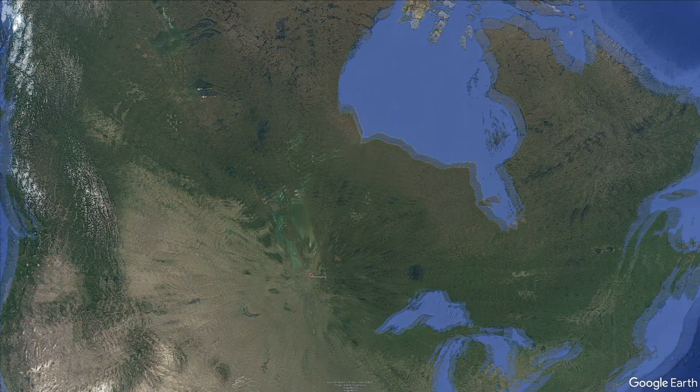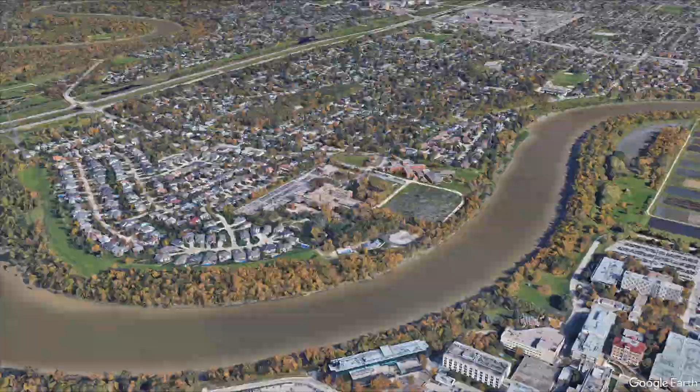Situated on the edge of the Canadian prairies sits the capital city of Manitoba, Winnipeg. At the very heart of the city, which 820,000 people call home, is the meeting point of the Assiniboine and mighty Red River. This site has served as an important gathering place for Indigenous peoples since time immemorial, and eventually also for European traders and settlers. It continues to serve as a meeting place today in the form of the vibrant cultural hub of the Forks.

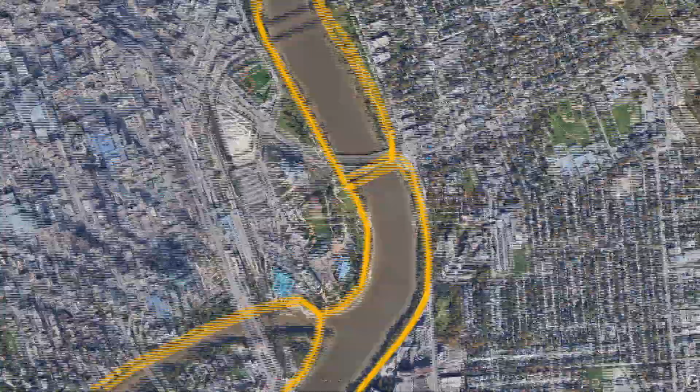The iconic Esplanade Riel currently provides an active transportation link between the Forks and the historically francophone neighborhood of St. Boniface, not only helping to reduce car dependency, but to also connect the scenic river trails on both sides. To improve this connection, the city is conducting a feasibility study into an additional active transportation bridge between St. Boniface and the Forks that can accommodate both park users as well as maintenance vehicles.

We are the University of Manitoba Steel Bridge Team. We are made up of over 55 diverse members and situated on the U of M's Fort Garry campus. Before we begin, we would like to acknowledge that the work done by UMSB was on Treaty 1 territory, which is the original lands of the Anishinaabe, Cree, Oji-Cree, Dakota, and Dene peoples, and on the national homeland of the Red River Métis.

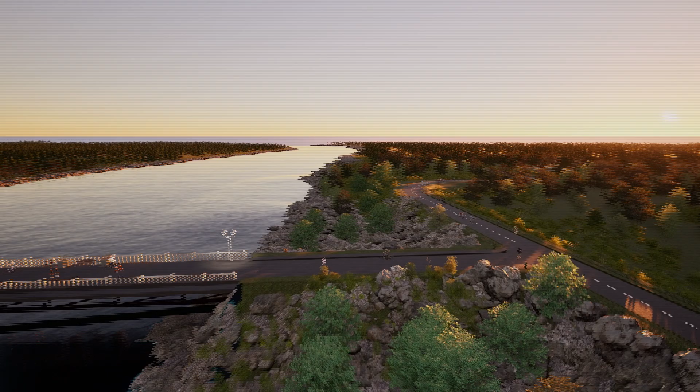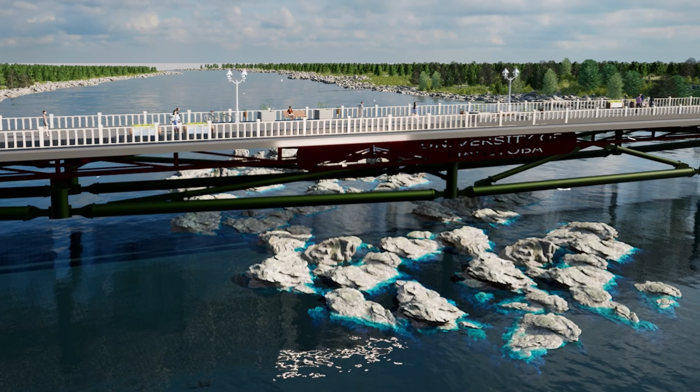The proposal calls for a 19-foot-long bridge designed to resist 50-pound lateral loads and 2,500-pound vertical loads. The city has requested that steel be used for the design for its versatility and its ability to be easily remanufactured after deconstruction, helping to create a circular economy for the project. The optimal placement for the bridge, however, is also located where an island sandbar has formed in the river. Being home to a variety of wildlife and birds, disruption to the island must be kept to a minimum during construction. Additionally, physical restrictions on site require that the bridge be asymmetrical.

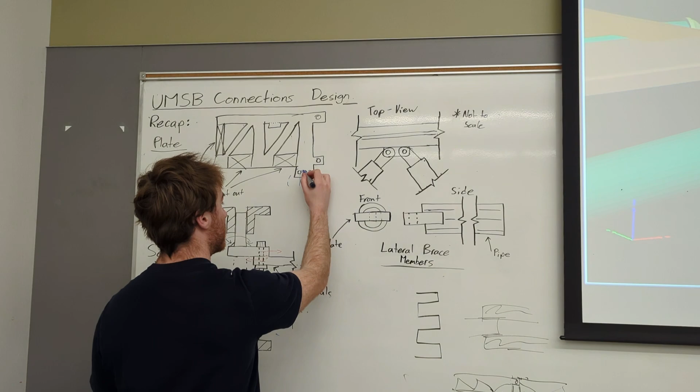Based on the design requirements and restraints, our team began working to create a 1:10 scale model of the proposed bridge. To begin, we started by splitting our design team into 4 different groups. This not only improved our team's efficiency, but also ensured that everyone was able to express their ideas in the preliminary design phase. This year, we decided to use the structural analysis software SAP 2000, as well as hand calculations to design and analyze each bridge, alongside the Handbook of Steel Construction.

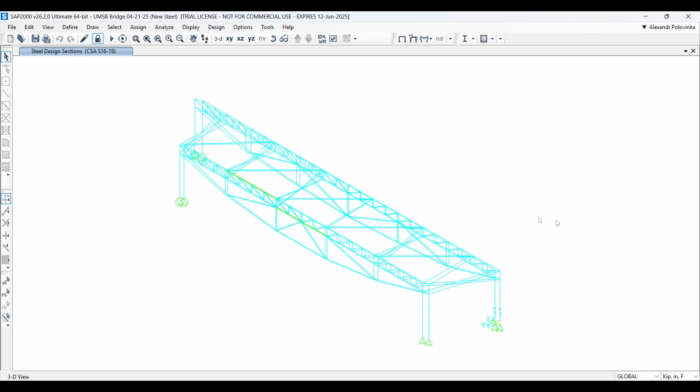Once each team had their frame designed, load cases and combinations were assigned to assess each bridge, allowing us to improve our designs. By using a scoring matrix obtained from the rulebook, we were able to compare the designs, the results of which were used to help choose our final design. The process was then repeated for the bridge connection designs.

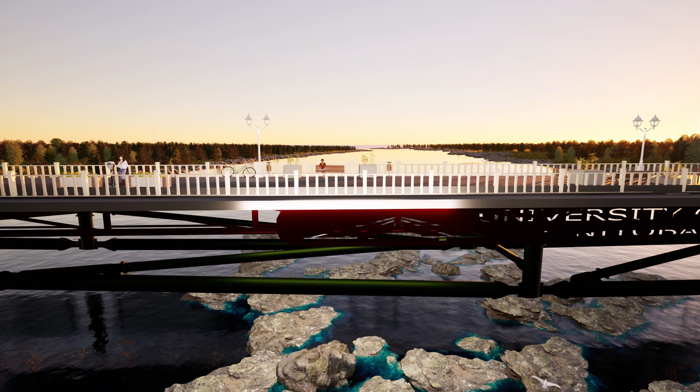Our non-symmetrical dual-chord system design features an open-web steel joist top chord comprised of pre-welded ELA members with a CNC'd plate web, as well as a more robust bottom chord comprised of individual pipe members. This satisfies the deflection requirements for the bridge while also minimizing the weight, improving the sustainability of the design. The two-system chord design was also chosen for its effectiveness against resisting load while minimizing deflection.

The bridge also features 3 types of connections. Single shear gusset connections were used on the bottom chord, which were chosen to improve constructability, while double shear connections were used on the top and bottom chords to meet strength requirements for the design. Finally, the lateral connections of the bridge are all single shear connections, further minimizing weight and improving sustainability.

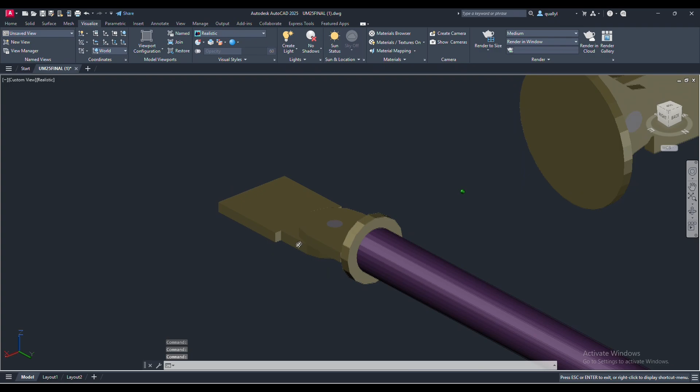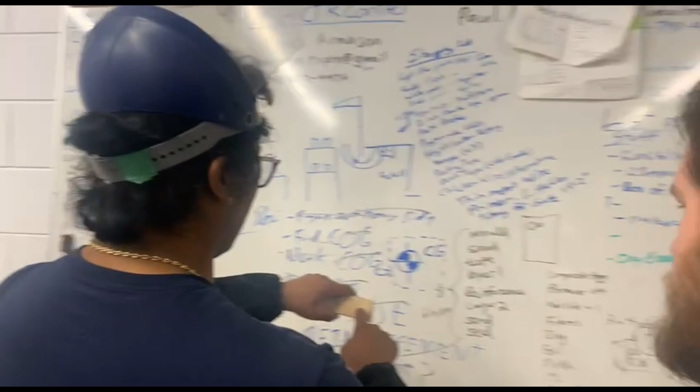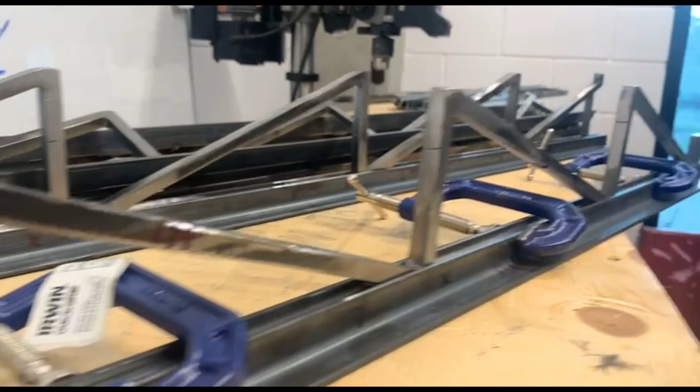Like past years, we partnered with a local company, Abesco Limited, to fabricate our bridge. However, this year our team decided to be more ambitious and to build up our in-house fabrication capabilities. As such, our fabrication team built out our stringers while also making modifications to further optimize the design. To aid in this process, our drafting team created fabrication blueprints as well as detailed 3D models in AutoCAD. This helped to create quality controls during fabrication. By working closely with Abesco's industry experts and combining it with the dynamic talent of our fabrication team, we are able to minimize mistakes, maintain quality controls, and find innovative solutions throughout the entire fabrication process.

From the beginning of the design phase, constructability has been a top consideration. This was achieved by getting input from the construction team at every phase of the project. This year, we're using 2 barges for both the construction and deconstruction of the bridge. This allows our team to work on both sides of the island, avoiding unnecessary disruption to the natural environment. These barges are then aided by a builder on both sides of the river, making for a total of 4 builders.

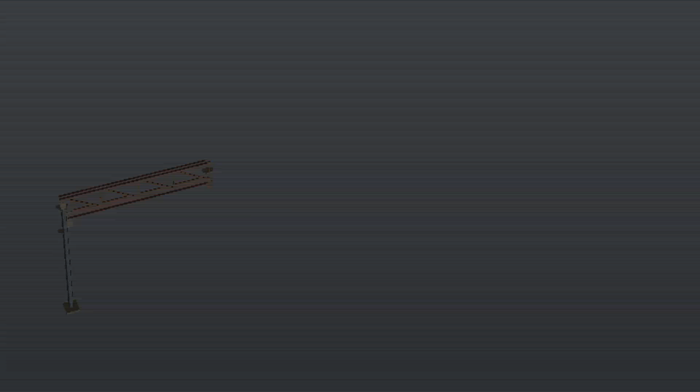The construction process begins with the assembly of members to form the primary truss of the north stringer, followed by the primary truss of the south stringer. The vertical components of the undertruss are then attached to the primary trusses, which are then followed by the bottom chords to form the lower arch. Diagonal members are then attached to the lower chord to complete the stringers. Lastly, lateral braces are connected to the stringers to stabilize the bridge.

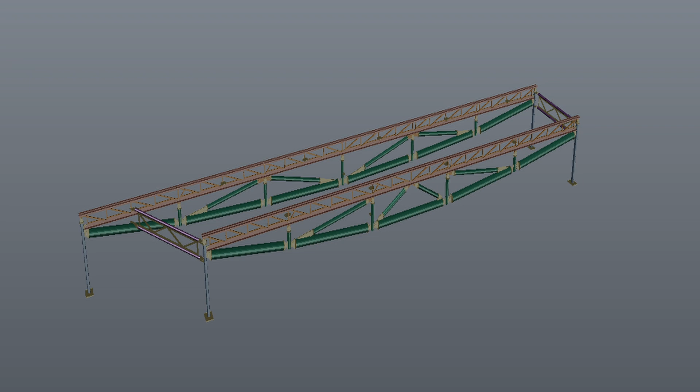The deconstruction process is almost identical, but in reverse order. This efficient system makes it possible to construct and deconstruct our bridge quickly, which improves the sustainability of the design while also minimizing negative impacts to the natural environment of the Sandbar Island.

The physical performance of a design is not the only thing that matters for a bridge, as its aesthetics should also be considered. Our bridge's geometry and angles take inspiration from the old railroad bridges that crisscross the Red River around the Forks. Combining this fact with its deep color palette, this helps our design to blend into the pre-established built environment.

At every step of this project, our team worked hard to come up with bold and innovative solutions to countless obstacles. With the support of our industry partners and advisors, as well as our team's diversity, we have been able to bring forward a successful project. With our design focusing on optimized bridge performance and constructability, our bridge offers both an economically and environmentally sustainable option for the proposal. A design that will hopefully serve the city of Winnipeg for generations to come.